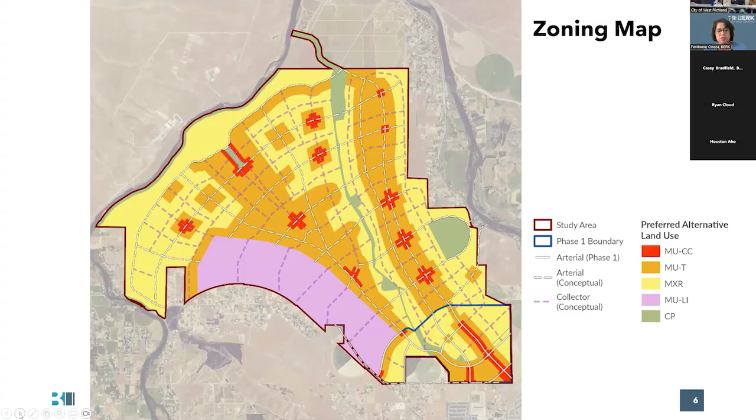This includes a zoning map, so it shows what types of zones and where they would apply. You've seen this many times, but it will be part of the development regulations, or part of the code. Let's go to the next slide.

This identifies some of the core intersections for this sub area and shows how it connects. It's not your typical land use and zoning, but it connects your street and zoning into one place. This is another example of how it will be helpful for developers or the development community. Let's go to the next slide.

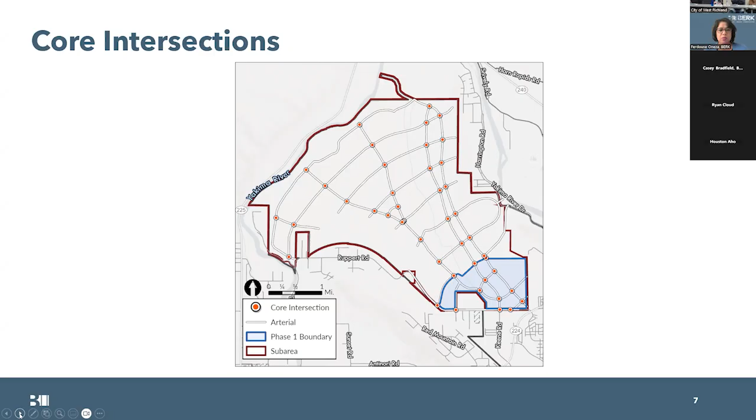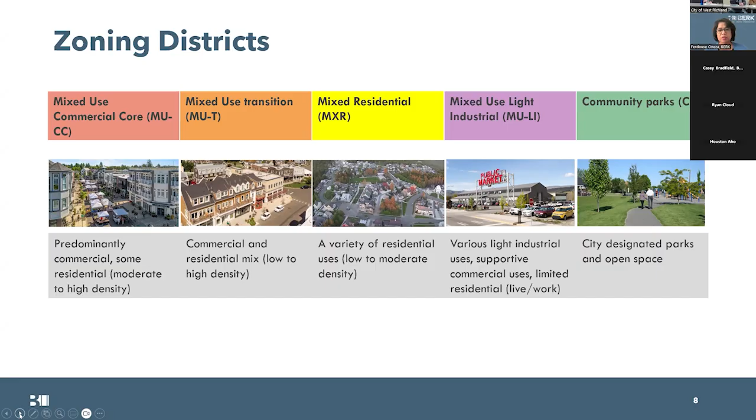Again, an example of how the zoning districts are categorized - we have illustrations and pictures to show what the zoning districts would mean in a physical context, how they would look. We believe this would give better predictability and understanding of what the zones are. We're looking at MUCC, MUT which is transition, mixed residential MXR, mixed use light industrial, and community parks, CP. Let's go to the next slide.

Building standards - these will also help the development community understand what types of buildings or developments would be allowed. These are standards for various development types - it could be commercial buildings, mixed-use buildings, single-family or townhomes, single-family detached. We're adding some standards and illustrations for that, including standards for mixed-use buildings that would provide additional clarity for the development community. We have illustrations that you've seen already. Let's go to the next slide.

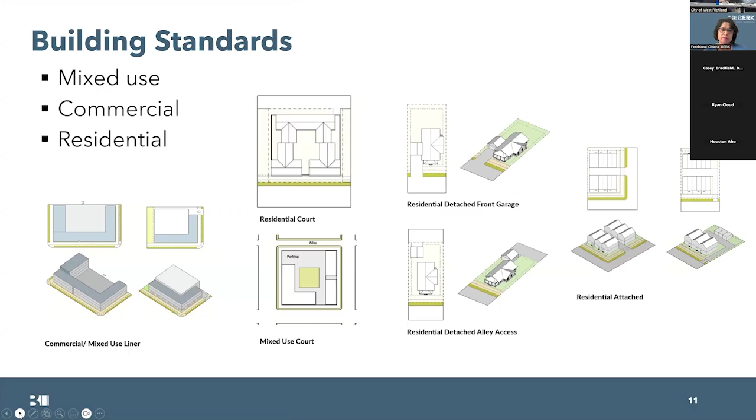We've added some additional standards for mixed-use developments that would apply to specific zoning districts. Generally, mixed-use buildings can be unclear to the development community, so we're showing with illustrations and diagrams that if it's a large mix of use, it could be horizontal or vertical - we have those illustrations there. It also adds standards for mixed use light industrial in the code.

Ferdouse, can I pause you for a moment? Yes. I just want to point out too that the upper right illustration could very well be a big box store there behind, with some restaurants or retail along the public street to the south or bottom of that image. That would be very similar to what you'd see at Queensgate. Now Queensgate's developed out, so definitely opportunities for that in the code and being able to make that work. Just want to make sure I address that concern shared previously by council and planning commission. Thank you.

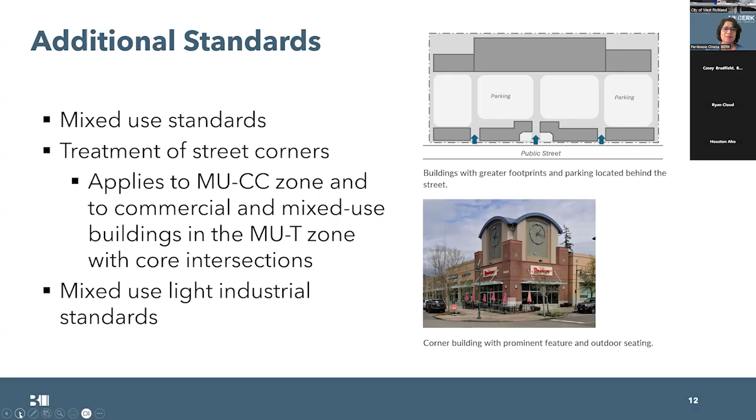This shows some examples of frontage types. We see frontages all the time—the typical porch in a residential home, or shop fronts in commercial developments—but this gives a clearer understanding of different frontage types. It talks about six different frontage types in the code and shows how they look in the layout, with examples of elevation and layout, helping to understand where the right of way falls.

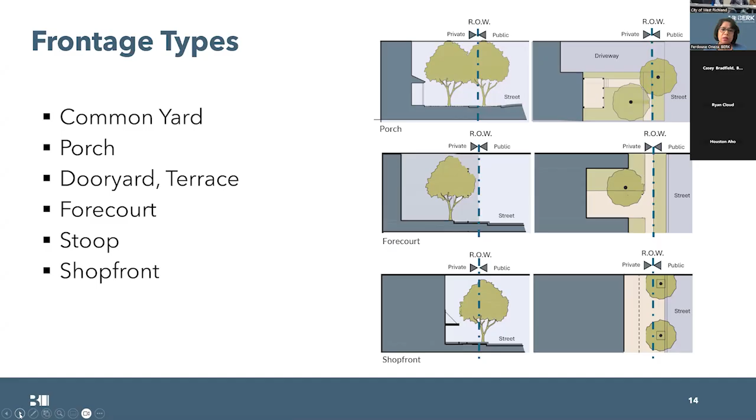Here are some examples. There are more flexible ways of adding shared driveways for single family lots versus zero lot lines—that's shown on the left side. On the right side, these illustrations talk about block length, and this goes along with a table showing different block lengths and widths for different zoning types. It also shows how it would look with an alleyway, and how it would look without one.

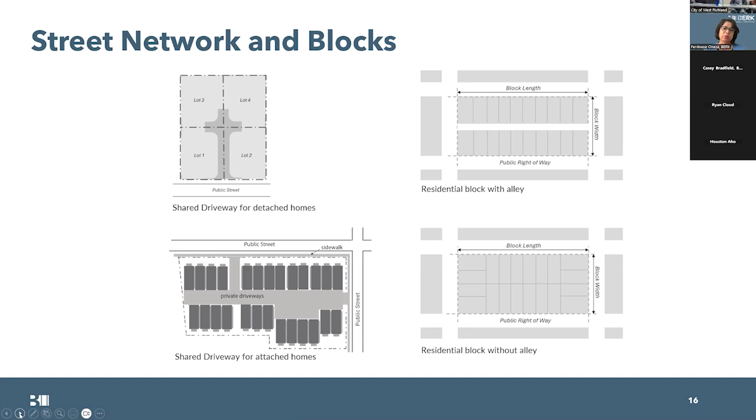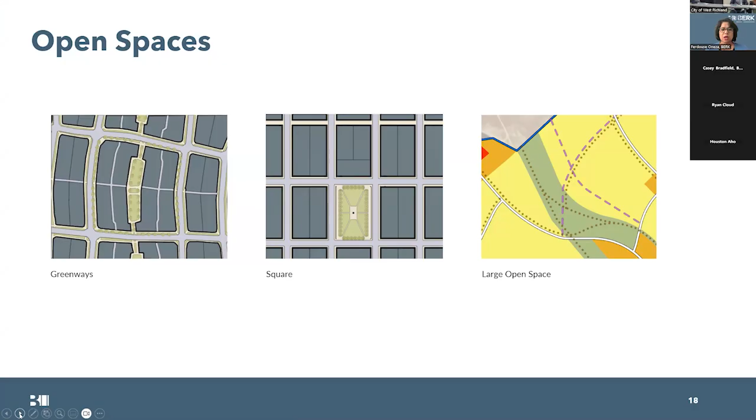These are examples of how greenways work—on the left side you see the street network and the blocks, and between blocks there are greenways, with a square in the middle, a central area where people could gather, as seen in many communities. The large open space is on the right side, taken directly from your sub-area plan. When you have large open space, that's also addressed in this code.

This is the last portion of the code, where we've added some additional standards like gateways, for when developers are putting gateways in neighborhoods, plus landscaping and lighting. For lighting, we're mostly referencing and connecting with West Richland's current code. For landscaping, the intent is to encourage more native and drought-tolerant landscaping sensitive to the local climate. This is the last piece of the standards.

So I think that's it, Casey. Can we go to the next? Yeah, thank you—I know this was a brief presentation, and if you have any questions, we are here for that.

Thank you, Oneza, appreciate that. As I stated, I sent this out a week and a half ago requesting comments and questions, so we can address those this evening and make it a productive meeting. I got comments from Mr. Smart last night, so I changed my day around a bit to get those addressed. We can go through those quickly. I emailed my responses out to both planning commission and city council, so you have those in your mailboxes.

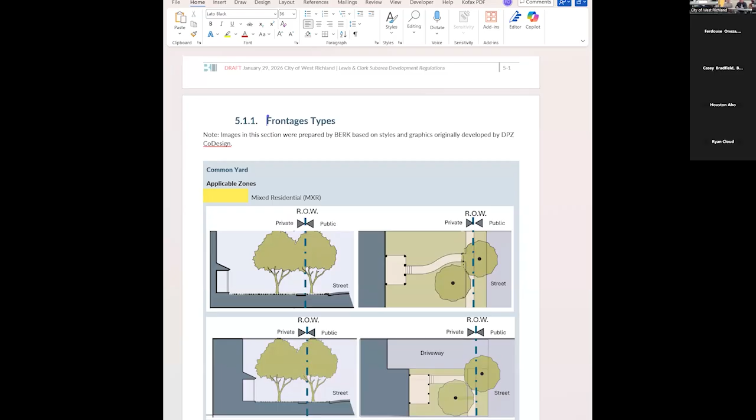And again, whether it's in the right of way - right now it's in the right of way - you as a property owner maintain it. Right, we know that. Well, I don't.

So here's the street, got curb and gutter right here. We got 5 foot of landscaping so that we can plant desert friendly trees or bushes there - those aren't going to work, I don't think, right? You got 5 foot of sidewalk, but this is the property line. What we had before was the property line was on this side of the sidewalk by 6 to 12 inches - well, 2 feet to 7 feet - and you'd have 12 feet of utility easement that was a no-build zone, right? So what we did, so that the houses didn't have to be pushed back so far off of the street, we could have them closer.

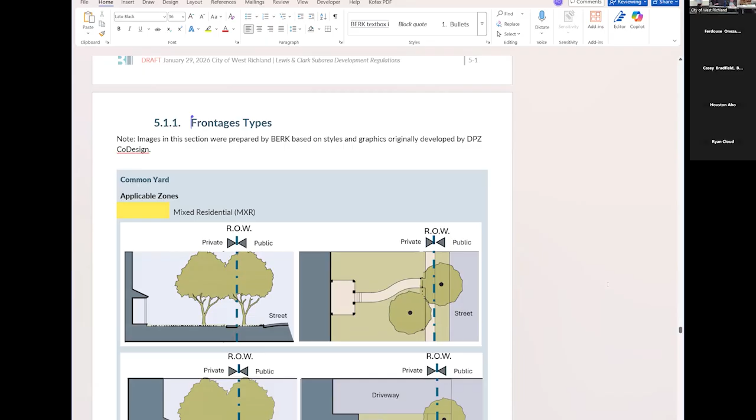But you will not put a fence at the right of way line. No, you can't put a fence on the right of way line, it's gotta be behind the sidewalk. We don't want to have a fence post going in and poking into a power line, for instance. That would give someone quite a shock.

So if they're gonna want to work with them on the fence, put in the plat that we give up the utility easement knowledge that there's 1 foot per fence there. But they're not gonna put their fiber line or whatever right underneath that 1 foot.

How wide is the sidewalk? 5 feet. So essentially, if you allow them to put a fence there, you're taking 6 feet off of your utility easement. Is that the plan? No, it's still there, it's still there. Well, I mean, they're not allowed to use it.

The sidewalk, okay, that's okay, right? Then they could put their fence and then the other utilities could put theirs in behind the fence. That's okay. The developer will have to know that's where they want to put their fence, on the backside of the house. Otherwise, they will be 7 feet away from the sidewalk. Yeah, very similar to how it is now.

I'm just wondering, what is the size of the area where the utility easement is gonna be? Where does it start? 12 feet from the right of way. Okay, so which way? Towards the house. Okay, so 12 feet, 7 feet past the 5 foot sidewalk. Correct.

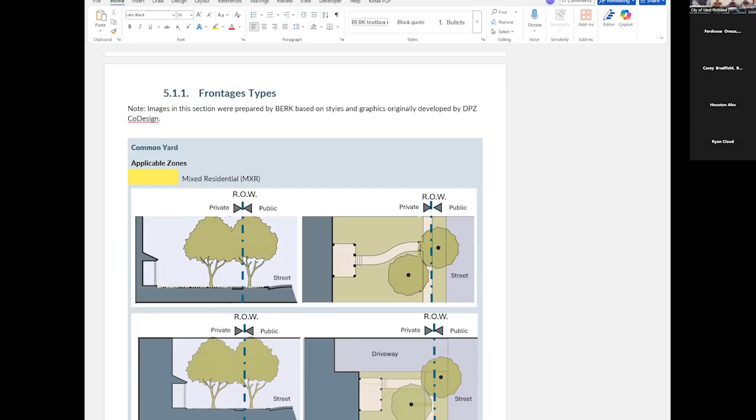So the next question is, how do we keep tree roots from damaging roads and sidewalks? Public Works has standards, which they currently have, but we require root barrier to be installed when you plant a tree within those areas, next to the sidewalks and curbs and gutters in the street. That limits the tree's ability to go out and buckle up those things.

We also have limitations on what you can plant, so we're not gonna let you plant certain trees that automatically go out wide, we want them to go down. So we have tree species approved for sidewalks that go down. Since these yards are so small, this is private property once they get bought, are you expecting there to be an HOA or something that continues this regulation?

Is it like the city gonna say you can't plant that sycamore in your front yard? That's not the front yard, that's the 5-foot easement on the street side of the right of way, between the curb and gutter and the sidewalk. That's a landscape strip, and that's in the right of way. The property owner is gonna maintain it, but we have code that tells them they have to maintain it and make sure it stays nice.

So what trees are approved - if something goes wrong and they buckle that curb with their tree because they didn't put the right one in, then they get to go and fix it because it's on them. I guess that's the way code reads today. So you've got this 17-foot yard, and it just strikes me as a potential problem if we don't have some sort of code that prevents people from planting that same sycamore tree on the other side of the sidewalk without the root barrier or whatnot. It's their problem, we get to fix that - we do it all the time, that's stuff we have to deal with. And they get sent a bill and get to fix the sidewalk.